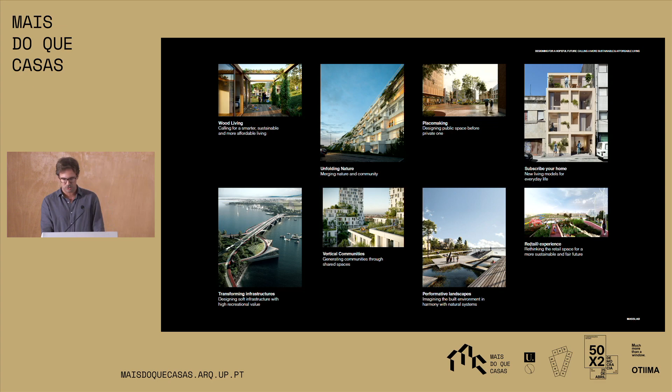So we imagine and design spaces from urban plans to buildings and landscapes to create a better everyday life. It's through a planet people approach that we build conditions for the future, because changing how people live will always change the world.

Here you can start to see a kind of a method that we do in the office. Because we think differently, because the world is always changing, we never go with one solution from the beginning till the end. We do a lot of options, iterations, as we call them, and we go with, for instance, 4 or 5 iterations for the same problematic.

This is a kind of a provocative quote: the client is never right. But actually they are never right, and we think that we know a bit better than the client what are the problematics, what's the need of the future. So we don't talk about adjectives or aesthetics, we talk about metrics and numbers.

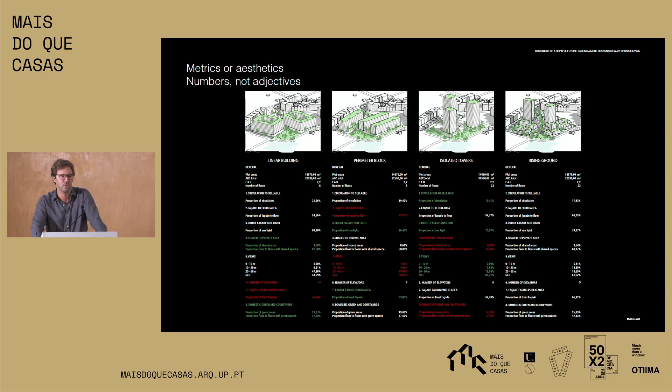So this is what we call to put things into a test. The metrics that you see below are basically the pros and the cons of each solution. So it's not regarding what we think it's best, it's what the project knows it's best for the context, the solution, and the needs.

The world is constantly changing. I think it's changing right now with issues and themes that we never thought of, technologically, politically, economically, sustainably speaking. So we do this kind of a game.

We think in the future, so that's why we call it 100 years. But at the same time, we always think about the same issues every 6 months, because what we think is correct for the future at this moment can change completely in the near future.

So by saying this, we don't have a manifesto, we have an attitude. It's not what we feel it's better for the world, it's what the world needs at this moment.

So for designing for a hopeful future, we need to think about the new living models. We know right now that the way you used to live before and the needs that we used to have before are not mandatory right now.

So we are not projecting when we are doing a building, a housing building, for instance. We cannot think in our mind in this common family of one parent, one father, one mother, two child. There's a lot of needs more than that, and what we feel is like we need to create bases, a structure that is flexible enough to adapt to the world, adapt to the needs.

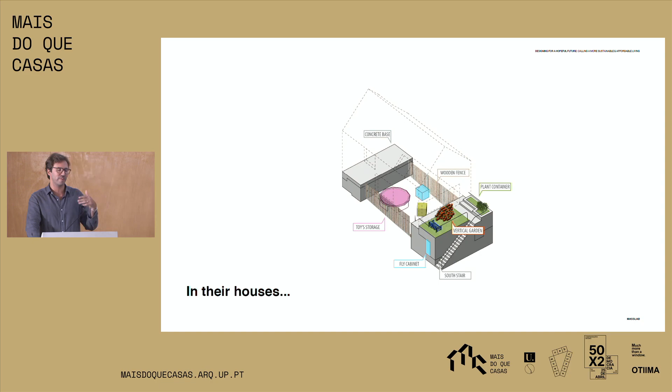So basically what we did is a concrete base that adapts to the slopes of the site, and then, by understanding the needs of each person, each family, we create a different house on top with different programs. So this is again a strategy of trying to adapt to the needs.

That was the first project. Then we started developing this idea of how we can create a plan that of course has a rigid structure, but at the same time can adapt to different needs. That's what we did in the past projects we've been doing in terms of housing here in Portugal.

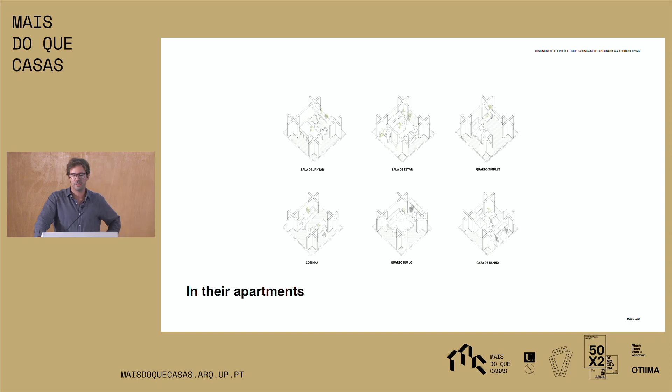So necessity dictates use and habits. Here you can see it's the same plan, the same rigid structure, but everybody, when they occupy it, can adapt it to each need. It can be a dining room, a living room, a bedroom, a kitchen. And here you see exactly the same thing—it's the same plan with different types of occupation.

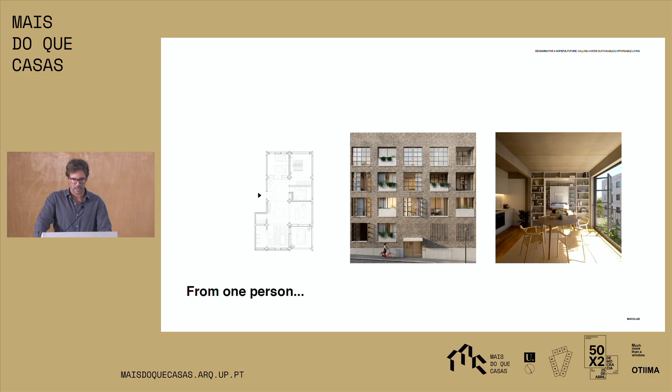So from one person to another, you basically experience different types of plans and different types of experience.

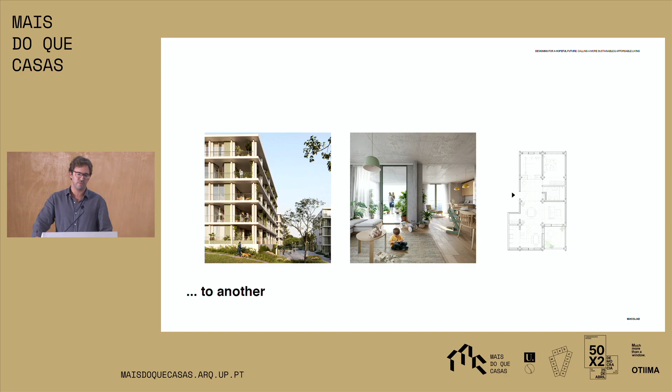Hi, everyone. So as Lorenzo was saying, we try to organize our projects on our agenda, and one of our biggest agenda items is to design public space before private space. I can recall that Paulo Mendes da Rocha states that people who live on top of towers simply don't live, because they are so detached from public life. We want to go from segregation to community.

I want to show an example. This is a project we worked on in Tampere, the second largest city in Finland. The project was in this area, completely detached from the city.

Although it's a master plan project, we wanted to create this sense of public space before private space. As you can see here, we wanted to have these three main axes: this fast track that connects with the city center, this neighborhood connection where all the inhabitants can meet, and, on a shoreline scale, this leisure line.

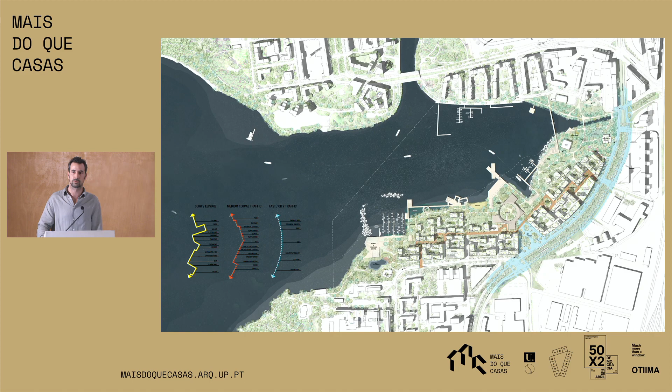We tried to create, in connection with the urban context, these kinds of social pockets strategically placed to promote public life, and also to create a hierarchy from private space to shared space to this leisure area on the shoreline.

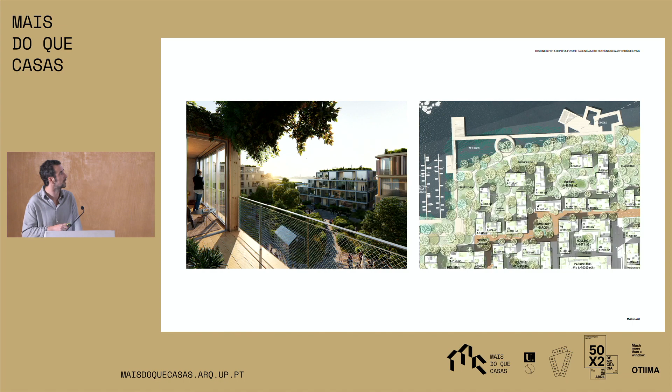We feel this example is quite cool, because community was at the core of this development. The municipality wanted a school at the core—not only a school, but a community center at the core of this master plan. We know the scope of this seminar is living, but we cannot detach living from public space, from community, or even from learning. So at the center of the master plan there was this school by day and a community center by night.

Now another example of this principle is in Lisbon—the Basílica da Estrela, one of Portugal's national monuments. We were quite happy about this because it's our second project that was actually demilitarized. Right now it belongs to the military defense, and the idea is to give it back to the city, to the inhabitants.

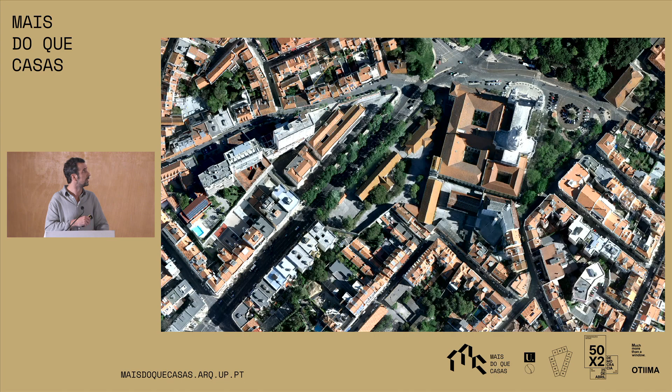It's our second project doing this, and we're quite happy to demilitarize these plots and open them back up to the city where they belong. It was quite intimidating to work with a national monument of this importance, but we were also seeking continuity of an unfinished city—we had these blocks that were pre-finished, with these weird endings happening.

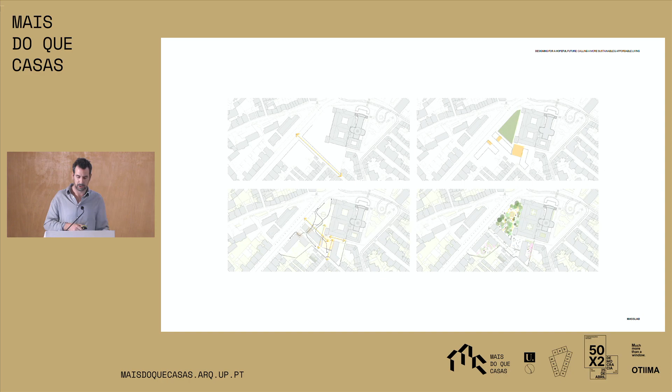So our basic idea was to reconnect this urban network, but again, because designed public space is to be designed in the beginning, we thought, okay, giving more room to the basilica and to have a garden, and then a public square over here at south, to promote this network of spaces where the inhabitants and citizens can enjoy it.

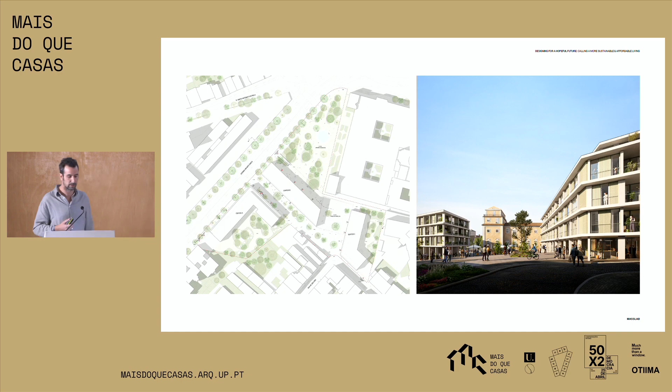Again, it's quite tough to talk about living without talking about public life and building cities, and this is quite an important issue for us. So how to generate a public space where the inhabitants can meet, but also areas of semi-public value, like this, where you can gather and have a sharing space that belongs to the inhabitants.

This is just showing a bit the different environments of the public space and how we try to reconnect with the basilica.

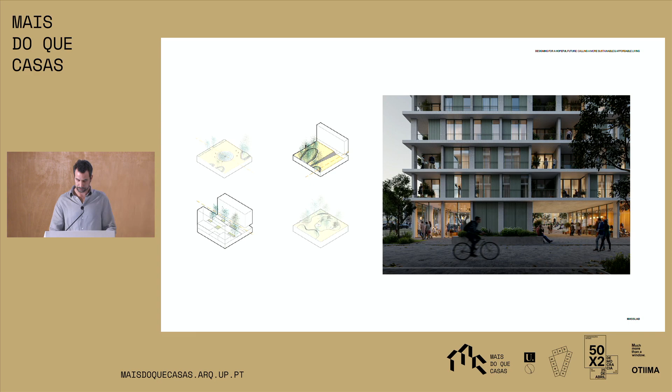So this project was promoted by IHRU, the national organism that promotes housing, and is promoting a lot of projects. We know it's quite a tough and a bit conservative brief from them, but we still had this sense of creating public space and a network of space around.

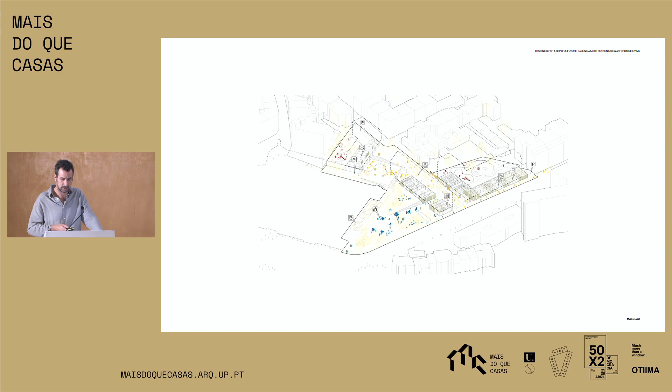In terms of the interior, the brief was quite conservative, we couldn't play, so we thought, okay, let's invest in the public space and the areas around. But there's no purpose talking about designing public space before private, if we cannot think about a shared living.

With this environment that is so challenging and so demanding economically, in terms of it lacking space on our planet, we started thinking that it doesn't make sense to privatize everything because we cannot afford it.

So why not share some rooms of our place? We can have examples from laundry space, but for example in Finland, we already see that with saunas, which not only promotes the sense of belonging and community, but also is more feasible economically, it's smarter, and we can all save space, money, and at the same time generate community.

But for us, this is nothing new. This is something that we already feel, and here we can see some images in Porto, like laundry space that was already shared, public life obviously, but even in terms of parties, São João, or having dinner with your neighbors.

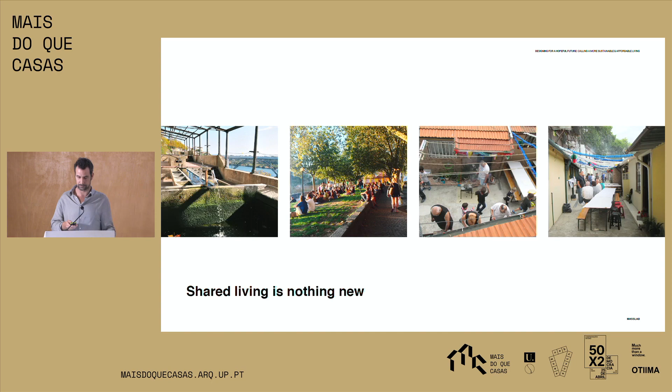I'm showing this because we're working on a small ilha - I don't know if I can translate it to Island - a small ilha in Bairro Maria Vitorina that is in Fontainhas. And we thought, okay, these themes were already there. For us, this was quite intriguing.

So we're not proposing something new, we're just basically in this example trying to demolish the old structures that don't have the conditions of living, or that don't promote this sense of shared areas.

And we wanted to stabilize a bit the topography, so we have room for these shared areas, and obviously some greenery to generate an active community.

We also had to reduce the number of houses because within this plot of 1,500 square meters, there were 24 houses. That is quite dramatic. So we tried to reduce the number of houses to provide better conditions.

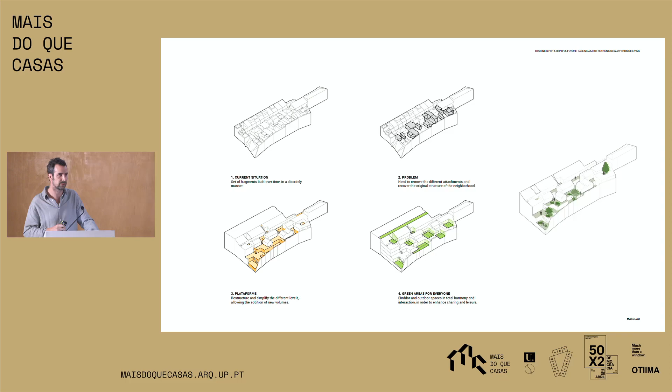And we had this idea of replacing the former structures that don't have a lot of quality, and kind of stabilizing the topography on these platforms. So we have these different areas of shared space where you have this communal living.

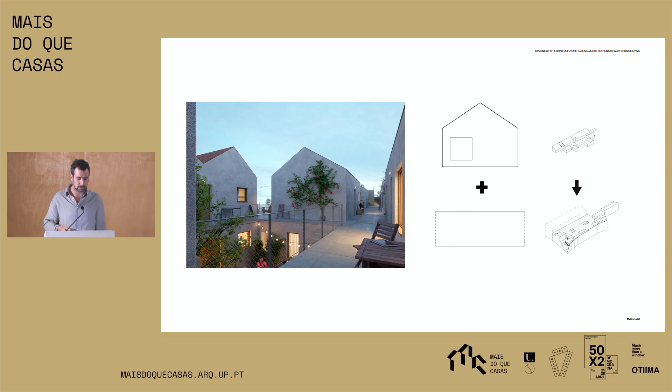A different example of this, that actually merges a bit this sense of designing public before private, but also shared space for all, was at a much bigger scale: Quartel Monte Pedral. We're quite happy that it's the second plot that has been demilitarized to be opened again to the city. This was an area of the city, the Rotunda Boa Vista, that lacked a lot of public space.

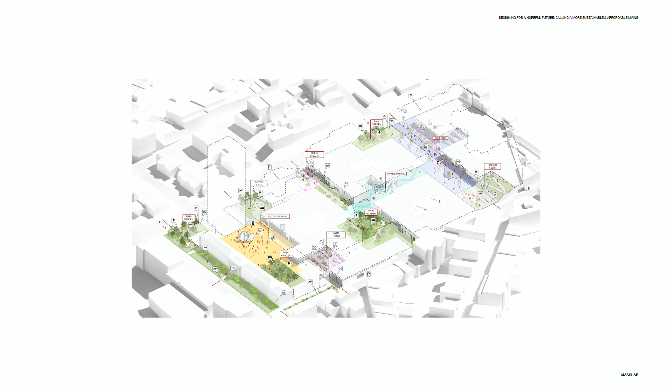And we had this brief that put a lot of pressure on the plots, like 50,000 square meters for a 25,000 square meter plot. So we had this principle again of designing public before private, connecting the streets around, but also providing room for smaller spaces, shared areas for the inhabitants - from urban gardens to urban farming to playgrounds to multifunctional areas, because designing this public level is as important as designing the apartments.

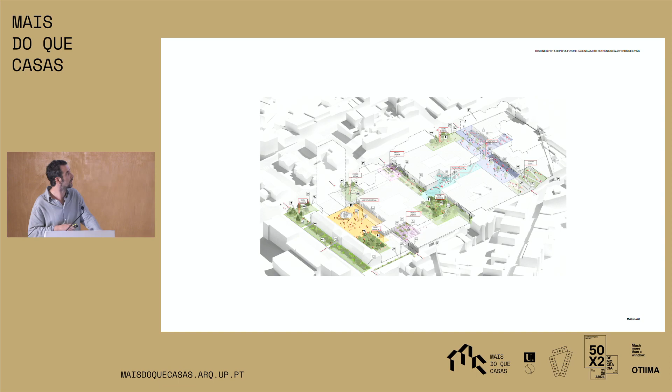We cannot fit living into just a single type of family, since the world is constantly evolving. So we try to create an array of possibilities that promote flexibility, and by intertwining the sense of the public, the shared areas, and the private, we promote a sense of community and of a more sustainable city.

So we only use what we want on the shared space. We promote the public space to enhance public life, and the private, because we obviously still need to sleep quietly.

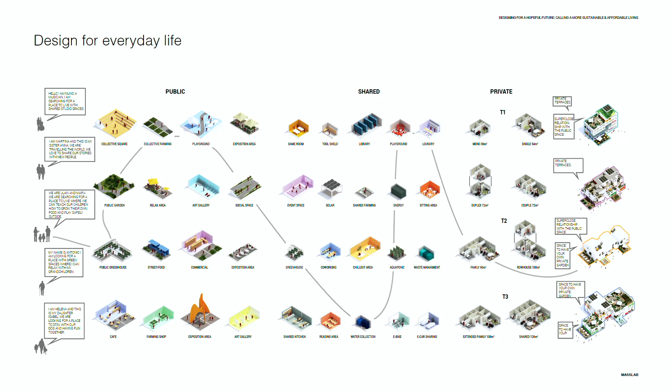So you can see the network of different spaces and the different values of the areas.

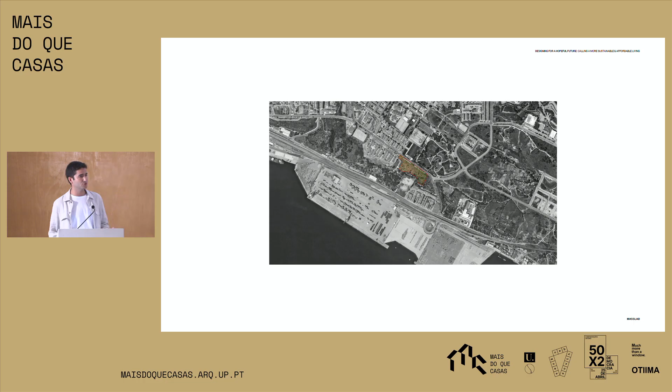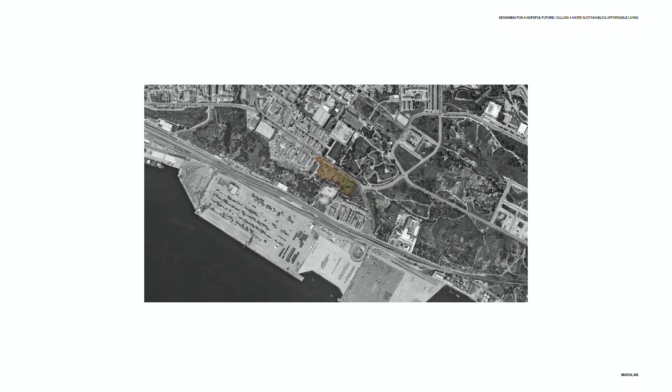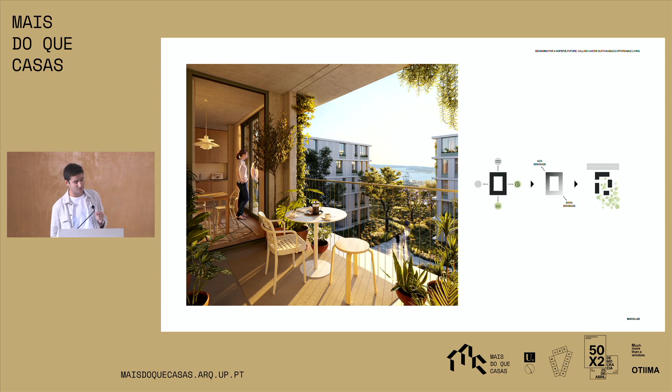Here we were in this in-between area that had a protected green area on the south, and on the north we needed to connect to the urban structure. So what we decided to do was create a strong hard edge in the north and do a gradient of construction to connect these urban parts with the green park on the south. Here we can see the scattered buildings from the park, and how we use this gradient to create and promote a close connection between views, between the park and the interior of the apartments.

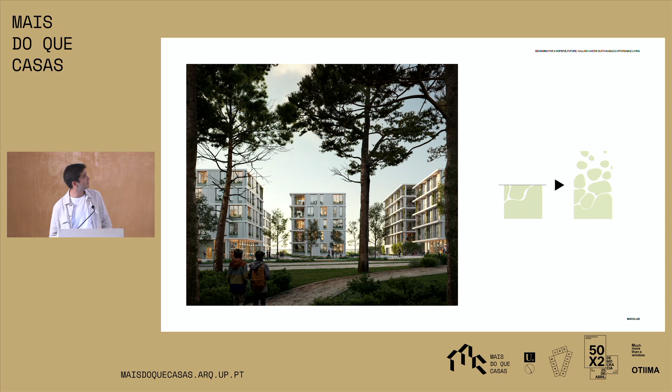From the urban part to the green park in the end, in between, we created the opportunity to make social pockets between the urban blocks. On each pocket we placed a different program: the leisure pocket, the sports one with sports activities, and the playground pocket. The idea is that by creating this urban infrastructure we can foster social interaction and community.

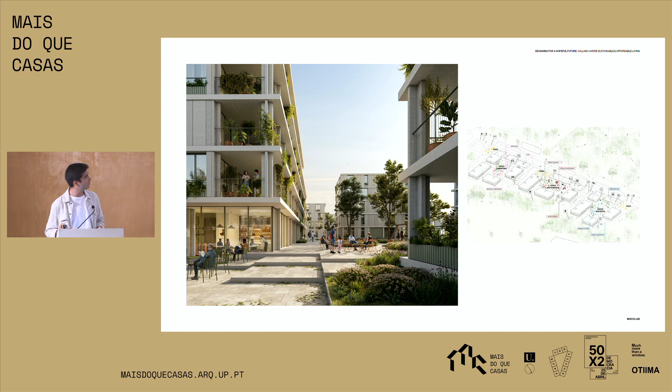So we had a project in between urban and green, but also one that promotes social interaction.

Another example here is in the north of Portugal, in a completely different context. We didn't have any urban planning, and the existing surroundings are completely disaggregated, from single houses to industrial plots to schools.

It was quite difficult, and we felt we needed to do something radical to unify this plot and its surroundings. So we made one simple gesture: creating a line that would work as a horizontal landmark in the surroundings. But then we actually created a problem for ourselves.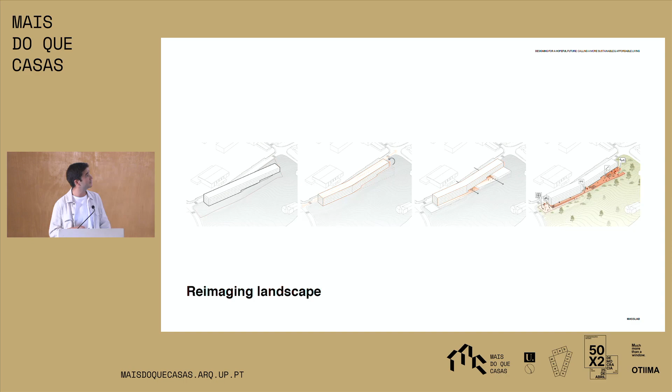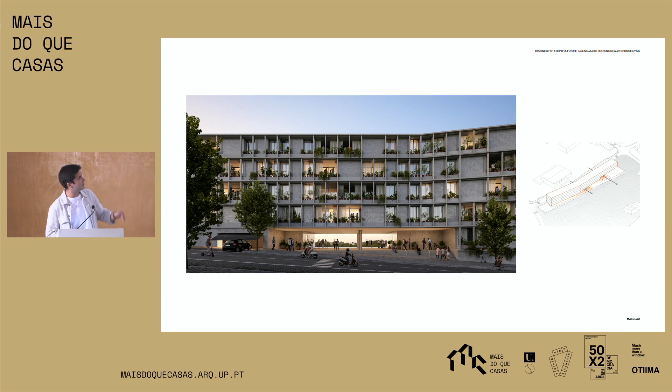How can we merge with the agricultural farmland of the surroundings if we create a wall? It's quite difficult, so we started to perforate this big mass to create the opportunity for crossing, but also for covered public space. We basically made huge voids in the building with the ambition to create a public space that could work not just in summertime but also in winter. So we were creating these covered plazas along the building.

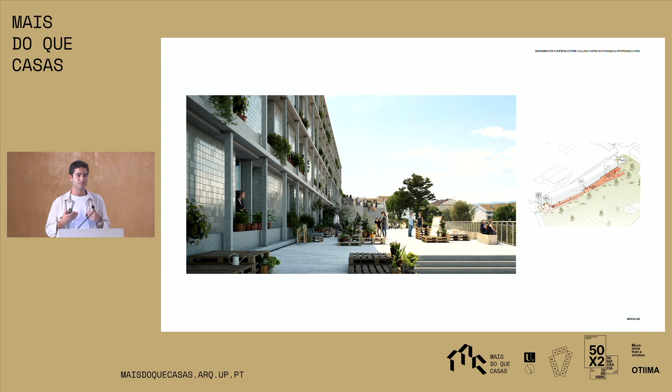At the end of these covered plazas, to mediate the relation with the farmland, we created a couple of social pockets, so it was like indoor and outdoor plazas in close relation with nature. So we created public spaces that bend into the green.

As you can see here, this long line of over 100 meters was able to create a couple of public spaces, a network that we hope will merge with the city, which was lacking a lot of these spaces.

A smaller example, even in Porto, I will try to merge nature and community within a building, not relating exactly with the city, is in Covelo, here in Porto, and we were in a plot that connects the existing urban part with the hidden rural part of Porto that we can see here.

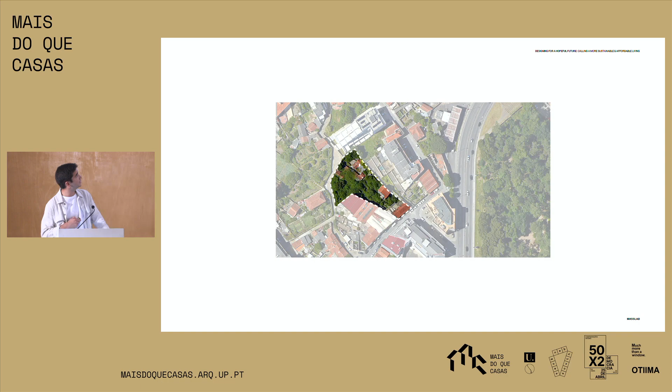So in this small project, what we tried to create is, within the building, a built landscape that would actually promote social interaction between neighbors. So it was a community within the building, and also a way to bring greenery to the entire building complex.

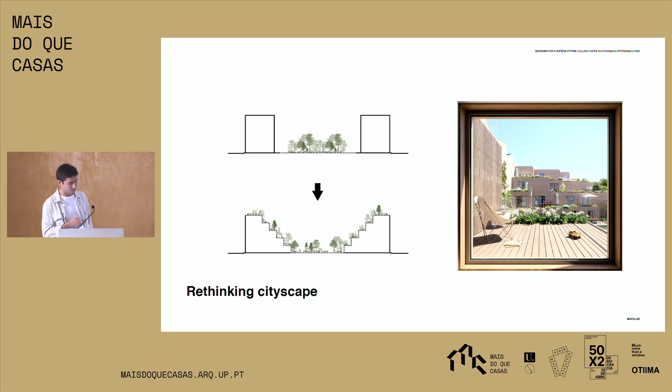We did this not just by chance, but because it was a response to the immediate surroundings of our plot. It was a very complicated plot. We had industry, collective housing, single housing, so really diverse. And what we did here is that we tried to connect the dots, and the output is actually the result of connecting these dots.

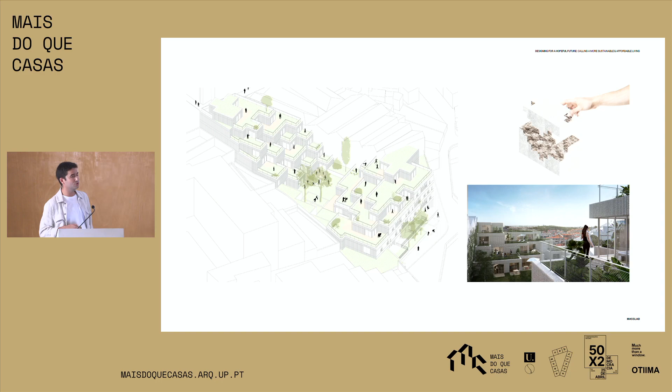And in the end, we had each apartment promoting a relation between indoors and outdoors, but also a common ground in the middle, creating this valley idea, with the hope to be like a close community because you are in close connection with your neighbors.

Now another idea that we use, which is also transversal to our projects, is this people-planet approach, something that considers both people and planet at the same time, not one over the other. This basically means, in terms of housing, that we don't consider housing as the centerpiece of a bigger network, but actually as an integrated piece in a more complex network.

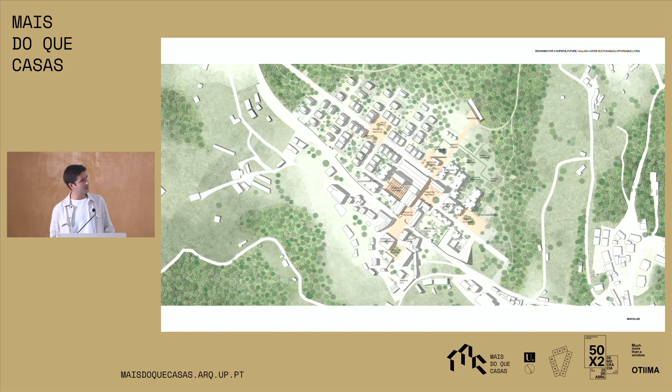This means that when you do, for example, urban planning, you consider food production, energy production, and connectivity of the city. So to show you how we do it, this is an urban plan we did near Lisbon, in Loures. It's a kind of eco-village that has an ambitious program going from affordable housing to health center, retail space, office space, and even small industries.

And what we did here, because we were in the middle of nature, is to blend all this construction with the existing nature. The plot was quite sloped, so it allowed us to mix our buildings within the nature.

We did this by using a way of thinking that considers what we call the cycles, a holistic approach to urban planning that considers people and planet. We considered the social cycle, which represents all the urban structures such as squares, plazas, and pedestrian routes, but also the economic cycle. This means we were able to design with the client affordable housing that could actually grow over time, mixing in other activities such as retail space and office space.

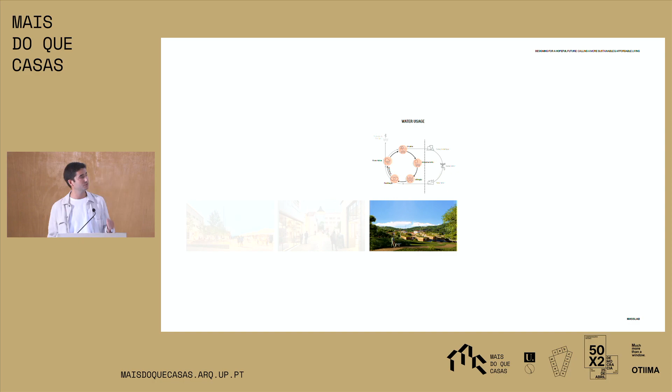The water cycle - this means that because we were in the middle of farmland, we wanted to create a water retention basin within our plot that would help feed the agricultural fields in summertime.

And the environmental cycle - because the plot was fully occupied by eucalyptus, a species that actually damages the autochthonous species, we took it out, preserved the cork trees that were there, and planted more autochthonous species on site. And finally, the production cycle, which respects the materials we chose for this plan.

So we couldn't have all these sustainable ideas and then come up with a brand new stone for the pavements. So we are now working with some quarries to use recycled stone, coming from other construction, to build all the roads and public surfaces. And for the buildings, we are studying the possibility of using just wood for the main constructions. All these cycles together represent this idea of having a holistic approach to urban planning.

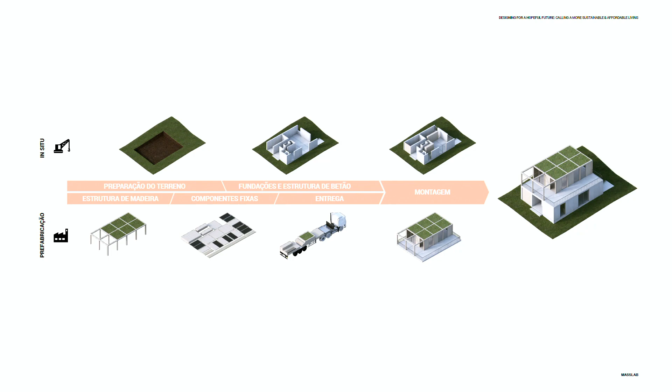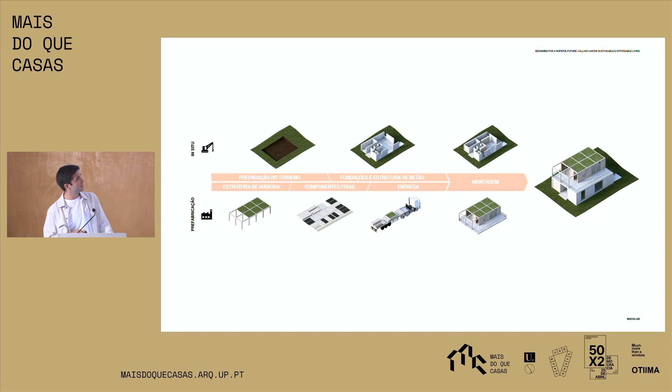In the same project, regarding construction, the terrain was really steep, so in order to mediate this relation with the plot, we used concrete structures made in situ. But for the upper level structures, we used CLT, a light wood structure that could adapt to the existing slope and actually grow over time.

This was the main idea we were able to put into this project - in order to make the housing affordable, we tried to recreate that idea of incremental growth, so the houses can grow over time. The upper wood structures could be able to start growing in the future, like a module that would be really easy to attach and grow with the families. So going from a model where the family, when it grows, needs to change the house, we are trying to do a model where the house can adapt to the growing needs of each family.

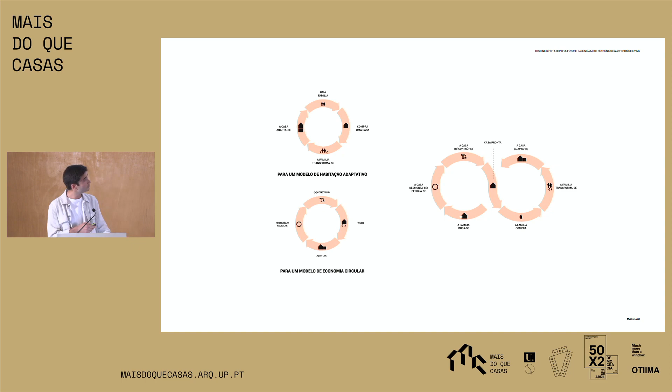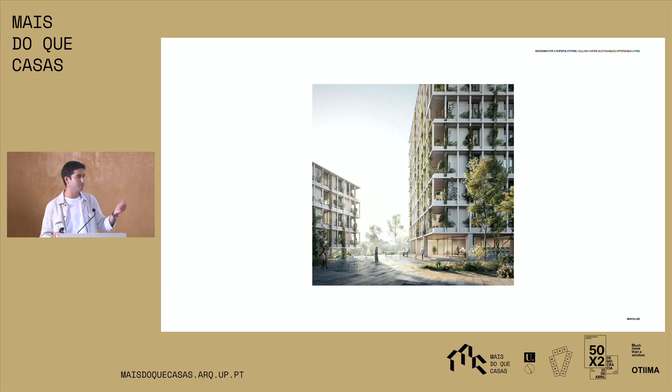And now just a small example of an open call for co-creation of a really interesting project that we are doing in Almada. This is a housing project with controlled costs. We wanted somehow to create some greenery on the facade, but we were working with controlled costs. We had an issue: we don't have money to build in-built pots or flower pots on the facade, and we cannot have a building that is high-end to maintain. So how can we do this?

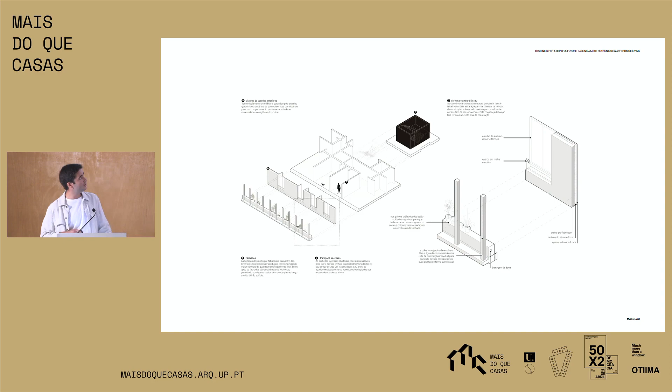We came up with a facade system that had in-built voids on the facade prefab panels, connected to the rooftop water collecting system and filters in order to irrigate the future plants. So each resident could be able to put their own plants on the facade, and this facade could adapt with the use of each inhabitant.

The idea was, okay, it can be a super green facade if people collaborate on building it, but if they don't, it's going to be more of a concrete building. The idea is to foster this sense of taking care, to foster this sense that in order to respect our neighbor, we need also to take care of our own living. So, thank you guys.

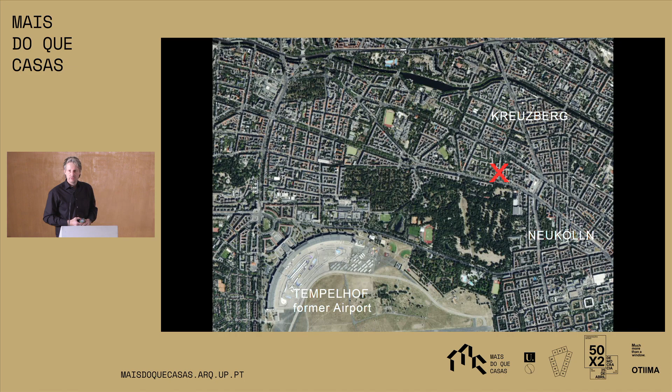You recognize this small partition of houses, and that is how this city was built and developed 130 years ago. Each house had its own client, usually not an architect but a masonry guy capable of doing these houses. This is how these areas, these boroughs, developed—and what a lot of people now, visitors or residents, think is so charming about it. There's sometimes also a lack of planning. This is what I want to refer to, and also the private responsibility of a lot of people, not only one client—but we'll get to this topic later.

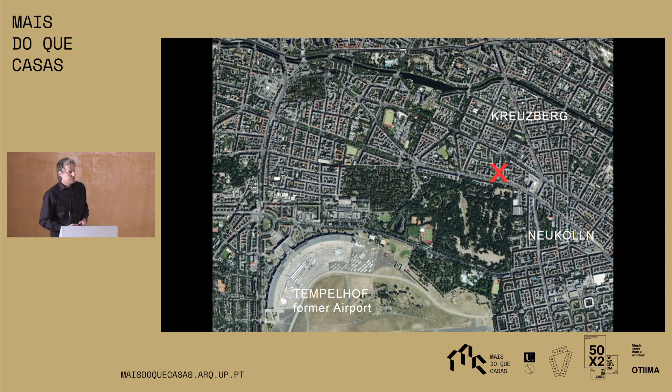So we want to talk about these three projects we want to present. It's a project we did 7 years ago—a shared space, Malmöer Straße—where 24 apartments of different owners built a group and we built the house together. Then there's the project Lovo, which Wenke Schladitz, my colleague, will present. And LOVV—these are both projects for the LGBTQ community, but you will get more information about this later.

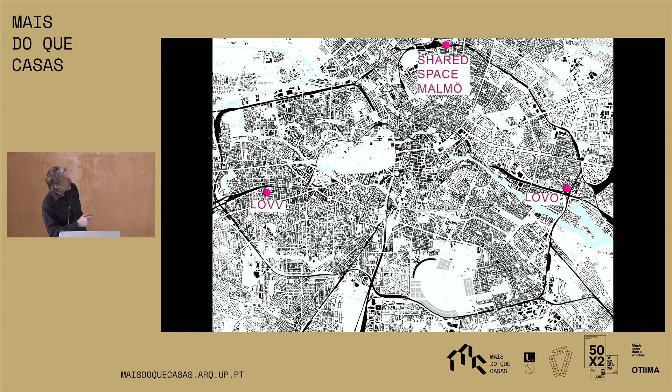You see, this is the inner part of Berlin. This is the public transport, the S-Bahn ring, the black line. And this project here is the one we talk about. It's in a very dense urban area. Later, Wenke will talk about LOVO and this LOVV project.

It's a thrift store, but it was run by a church-like organization, and it was an important element in this neighborhood. We found this lot, and it was clear from the beginning that this hut had to go. But we knew we would be part of gentrification, and I think this is what happens all over and will happen in the future. Gentrification, but you can control a little bit of the things.

A private client would not have made this store, because this area costs money, and you could have built an apartment also in the ground floor in Berlin. But this group decided to take the money in hand, and they made a long-term contract with the people running the store, and they get rent, but it's only rent without revenue.

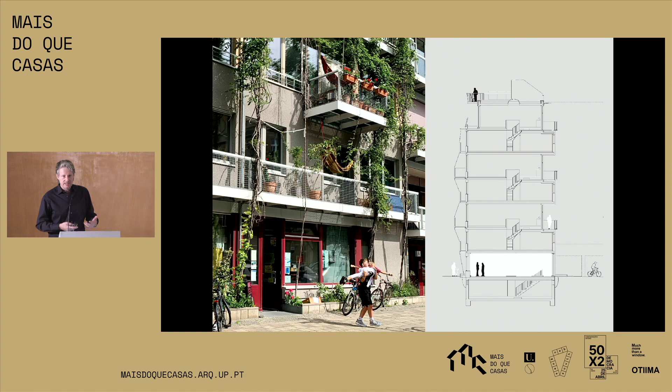So here you see the facade, you see the little green plants. In our case, we decided not to put the plants on each floor. They start from the ground, and even after 5 or 6 years, you see the facade gets a little bit wild, so of course we like that. The people use the facade. And that's what it looks like now. After 7 years, it's a Glycinia wisteria. I can recommend it, I don't know whether it works, it grows here in Portugal. You have much nicer plants, I would say.

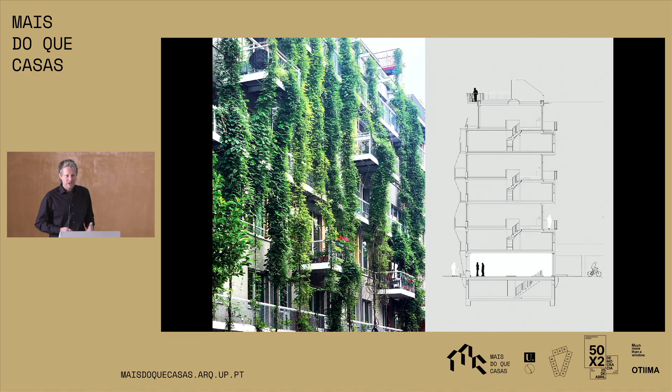In this case, it was clear there's a gap between the 100-year-old buildings, and we have to go like this more or less. That was clear from the city planning. But then the most logical thing would have been to do 2 staircases, given the size and the typology of the adjacent buildings.

And we decided, though it took a while, that we make 1 staircase. So what's so interesting on this issue? The interesting part is we were building for a group of people. These people got to know each other over the process of building, so it's not individuals. And if you want to use the staircase and the means of circulation also as a social space or communicative space, you have to understand that if you make 2 staircases, the person from staircase number B is someone you don't meet accidentally. So it's a very simple thing, but we decided to make 1 staircase and put open corridors on the back.

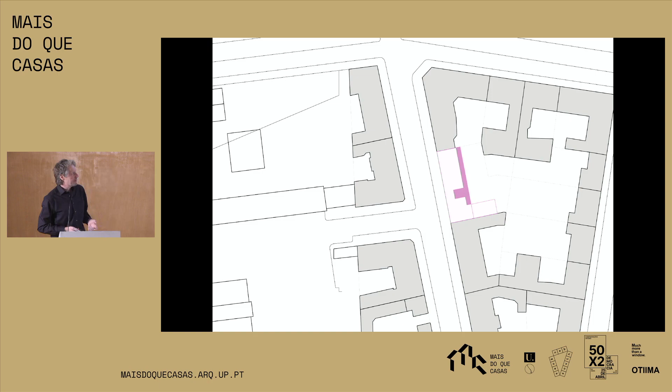Also to deal with these means of circulation, because that's pretty all we have. We cannot add money and space to make communicative spaces, but we could work with the means of circulation. So you enter the house through a lobby, and there's also this little detail on the door, which is, of course, communication in different scales.

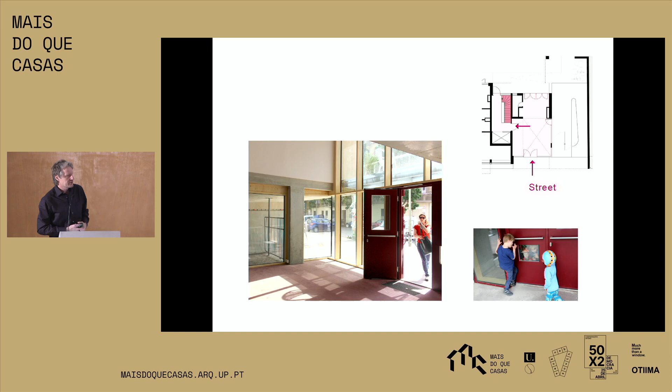This is also multifunctional. It functions as a lobby every day, but you can also use it for different purposes. When it's used, of course, you take the ramp to the garden and enter the house from the back. So there are multiple connections visually, but also walkable connections in different ways. That was important for us - not arbitrary, but in a logical way.

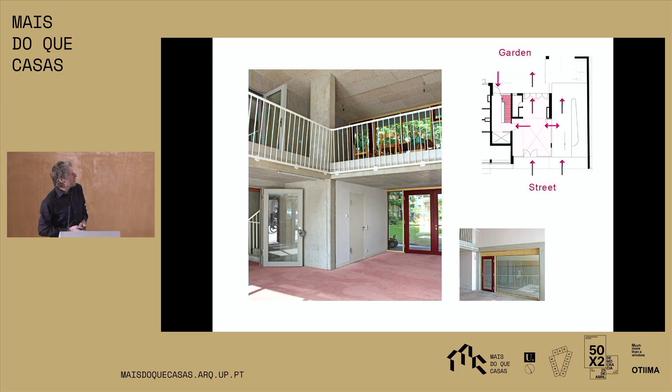So from here, now you see how you enter the garden. You see the ramp that leads down to where there's a big bike garage. And since you did not have to put insulation, it was fun for architects also. We needed some fun part to make some nice concrete structures.

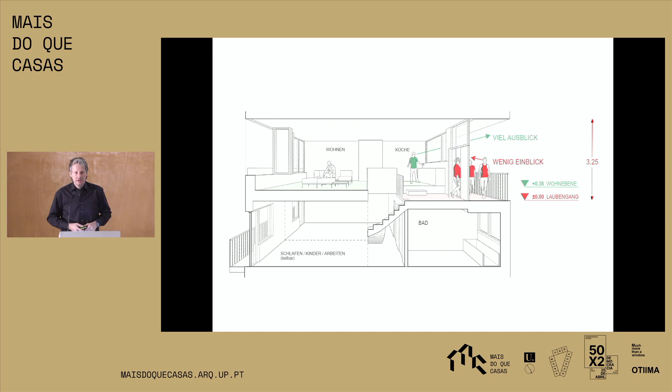I have to get to this scheme. So the trick, you can call it a trick, was that the Laubengang - this corridor - is where the red people are, is on one level, and you enter the apartment on the same level. But as soon as you are in the apartment, you go two steps up. So in this kind of communicative hierarchy or social hierarchy, when you are in the apartment you're of course private, you're vulnerable, and so we put the person in the apartment on this higher level to look down to the public.

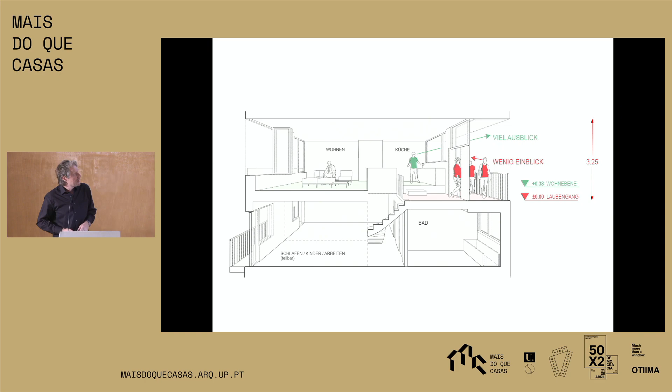It's a very subtle, small change, but it really made this Laubengang work. And it's also a small Laubengang, but even so, people use it, people meet there, and I would say it's an interesting scheme. Now again, you see how the kitchen always overlooks the Laubengang and how the person in red is on the lower level.

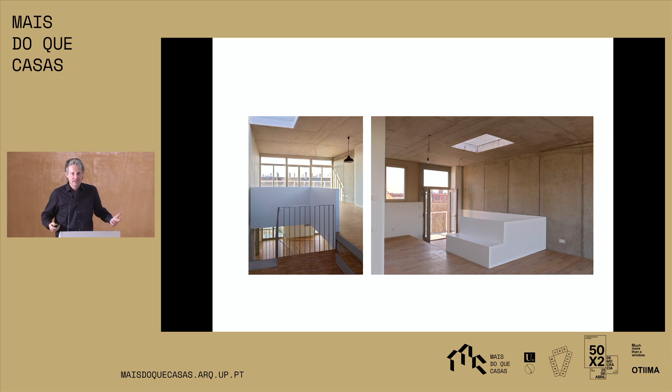But we made this piece so we could remove it. So people, in case they would ever have somebody come and check the apartment, they keep it in the cellar - it would be there - but otherwise they use it like this.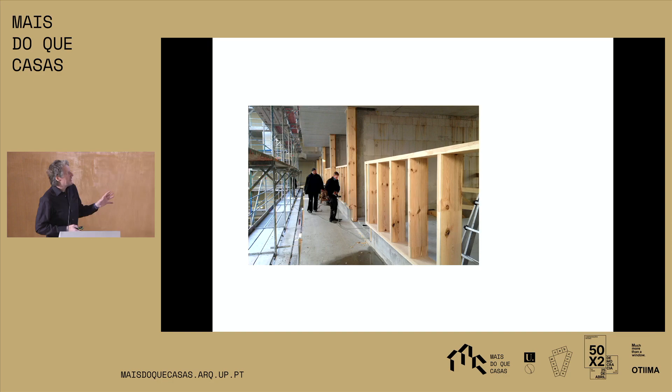It's a hybrid building - that's just to the end, saying something about the construction. It was one of the first at this time, 8-9 years ago; it's now a very common practice that you have a massive structure of the building, but all the outside walls are made out of wood.

And here, this is a picture a lot of people like, but to be honest, what's on it? It's a rectangular cube, and we left the surface of the concrete, and the only thing is the window. Sometimes it's really small things that you have to do as architect that really make a difference in how people use the space.

So now, Wenke, I think we go and hear something from you about LOVO and the LOVV project. But before you start, I want to just say two sentences about the structure or the evolving of LOVO. This is part of the LOVO facade.

So my partner Ulrich Vogel, he sits in the audience here as well, and we decided to get really financially involved into this project. We thought this is a house that Berlin really needs, and we found a bank that financed it, and we found the lot. That all sounds very easy now, but it wasn't easy, but it is possible.

If you understand a little bit about economics, and now again I have to address the ranks in the back, because you are our future. In a couple of very little years you will be confronted with this question: what do I do with this profession? How do I gonna work? If you understand a little bit about this boring stuff, like economy, financing, and a little bit about contract law, you can bring people together to start a project. So you don't have to sit and wait for not the right client. So you have some more power than some of us traditionally think.

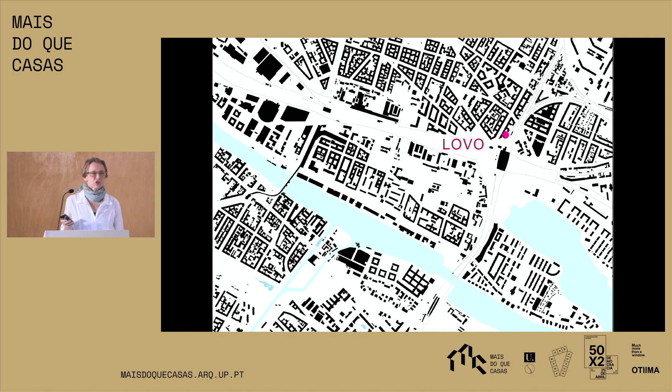Also, in the ground floor we have the common public space, then four floors with shared apartments for the LGBTQIA+ scene, and more or less 25% refugees. And the upper floors are three apartments to rent on the free market.

As you approach the building, the first thing you notice is the cafe on the ground floor. This is a small but important place to open the house to the neighborhood and for everyone who comes by and wants to have a look and go in. And what is also very important is that the people who live in our house have the opportunity to work there.

In this house live people, most of them were not really able to work 8 hours per day. They need support in everyday life, and some are mentally ill, others are in need of care. So some of these people can work there maybe for 2 hours a week, and this is great for them to make this work experience.

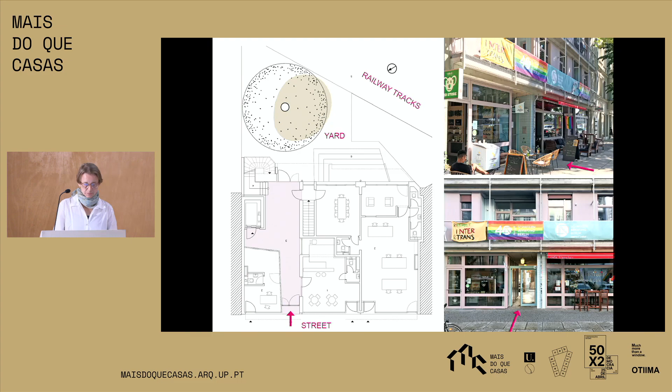So here you see the site plan. This is the property, it's right and left existing houses. At the back of the property, it's bordered by railway tracks, a kind of natural barrier. The terrain rises a bit, and for us it was always a question if it's safe for this vulnerable group to build a safe space. But we didn't want to build high fences or walls, of course.

So we also thought a lot about the entrance, the main entrance. You see where these arrows are. So we decided for a glass door, so you have a look through into the garden, and the entrance is between the shop and the cafe, so it's very safe at daytime because there are always people there.

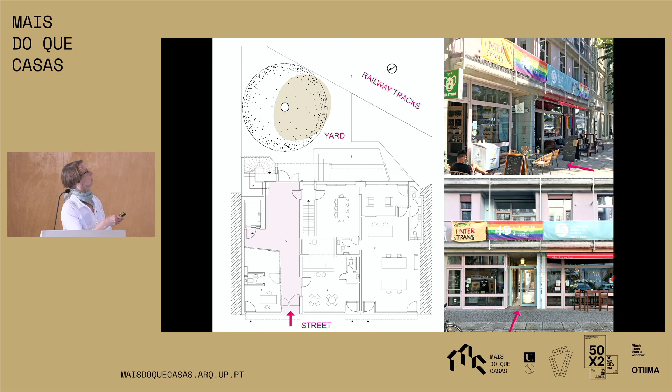And yeah, so let's go inside. This is a passageway. Also here is this one.

It leads to the elevator, to the stairs, but there's also enough space to repair your bicycle, and maybe you're protected from rain. If you sit outside and it starts raining, you can put your table inside. This is what we always try to do, to use the space multiple ways. In general, the space was limited at this project, and so was the budget, so we always find solutions to save space and money.

A question we discussed very often was how to create a safe space for this vulnerable group of residents, so that they feel protected, but without losing the open and welcoming character of the house, and so the residents don't feel locked or isolated. This is a contradiction, but we try to create a so-called safer space.

I think many of you know this term. It's actually a space where people who face discrimination in everyday life for different reasons can meet, have a break or pause from discrimination, and exchange with like-minded people. These spaces have a higher sensitivity to discrimination themes, but they are also not totally safe, because this is also wanted—the people should not feel totally isolated.

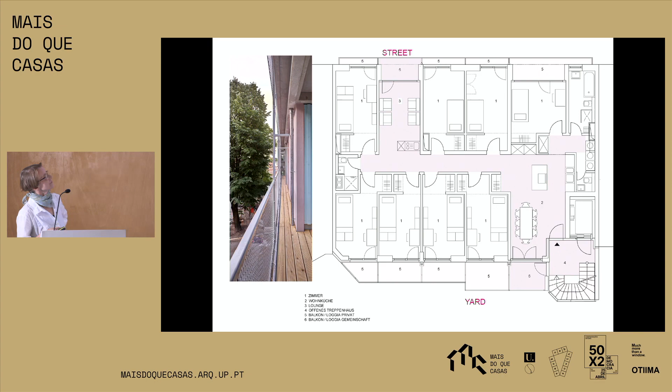So here's a floor plan of a regular shared apartment. You enter the space here in the staircase over the yard, and then there's a common kitchen, no corridor or something. You can go this way, and then you're back to the street—it's a kind of circular thing. So we try to avoid dead ends all the time. This is a private room.

We designed simple furnishing for one room as an example. Here are some common spaces, and a barrier-free accessible bathroom—we put an effort into designing a beautiful bathroom for people also in wheelchairs.

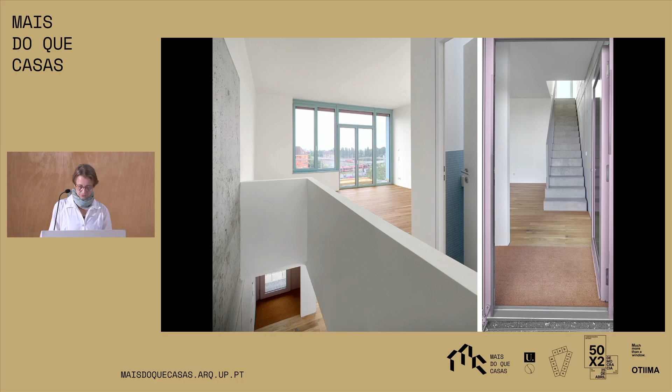So here are the two upper floors—this is a kind of three maisonette luxury homes, accessed via open corridors again, also called Laubengang in German. These apartments are luxurious in a spatial sense, with four balconies and great views, and they are rented on the free market. The high rents contribute to the financial concept of the whole building—it's a kind of cross-financing. The higher rents in the upper floor support the lower floors.

As we all know, the perception of colors is very personal and subjective, but in the end it really makes a difference, and we are really happy that we decided on 4 colors this time. We tried to develop a sensitive, graduated color concept, and it makes the building really more friendly and inviting, I think.

So our next LOVO is a LOVO with double V. It's situated in a nice area in the west of Berlin. Nearby is also a train station, and it's a very nice, vibrant, popular area.

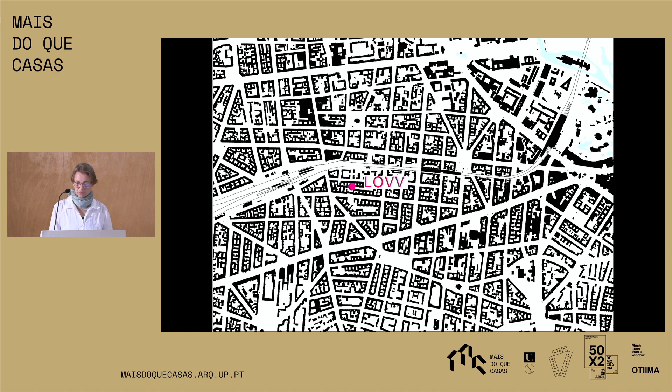We are almost ready with the planning now, and the construction site has already started. It's a kind of extension. The first LOVO building in the foreground was an existing building converted in 2011, and we are now planning the new one in the yard.

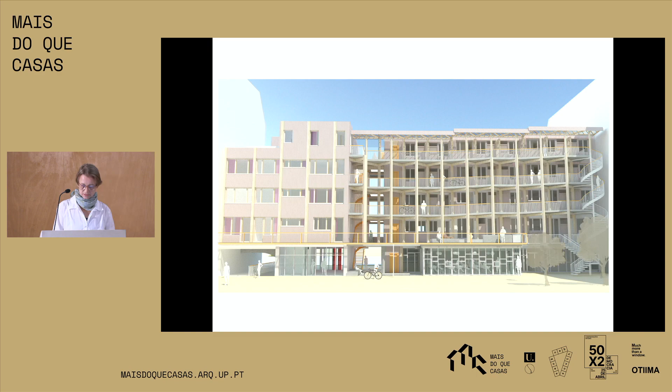Many spaces for community, like a library, 3 common rooms of 30 to 100 square meters, and a fully equipped kitchen and different other things. A bit closer.

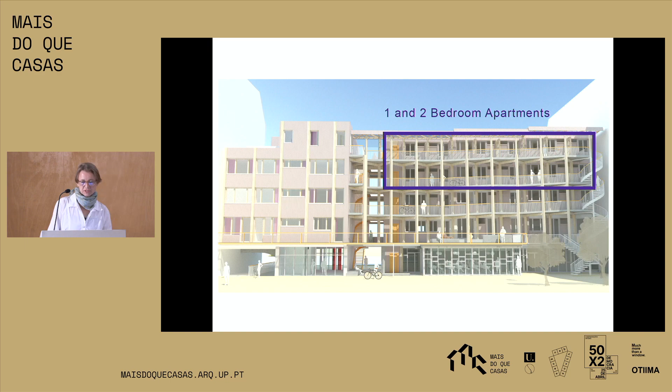So here, this time we also have a special mix of LGBTQI+ people, and the mix is also more special, like in the other building before. We include very young people too.

There's a shared apartment for teenagers, and we also have student shared apartments, and again for older people in need of care, and also 1 and 2 bedroom apartments. It's a mix of different forms of living.

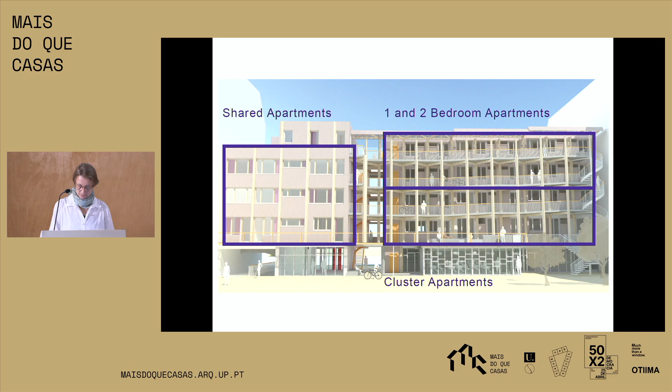This time it's a wooden structure. The supporting structure is also made of wood, the walls and the ceilings. It's so-called glued laminated timber.

We are mostly excited this time about this type of so-called cluster apartment. I think many of you know this term. Every inhabitant has their own very private space, here in this area with the greenish windows.

It's relatively small, but there are spacious common areas for all, and we try to find a good balance between the private and the common spaces. For instance, there are 3 entrance doors, so you don't have to go through the kitchen all the time if you don't want to. You have other possibilities.

So you can divide it with curtains, you can have a guest room inside, you can furnish it, of course. I think if you compare it with a 30 square meter apartment, you have much more possibilities here to do anything.

Also you have a fully equipped kitchen, you have a big table, you can invite a lot of friends, but you can't if you live in a small 1-person or 1-room apartment.

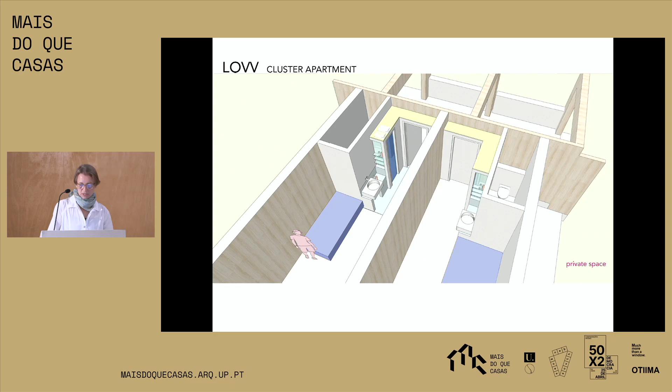So here you can also see that this arrangement of the walls opens the space more up and lets the space appear larger, and allows an optimal use, I think.

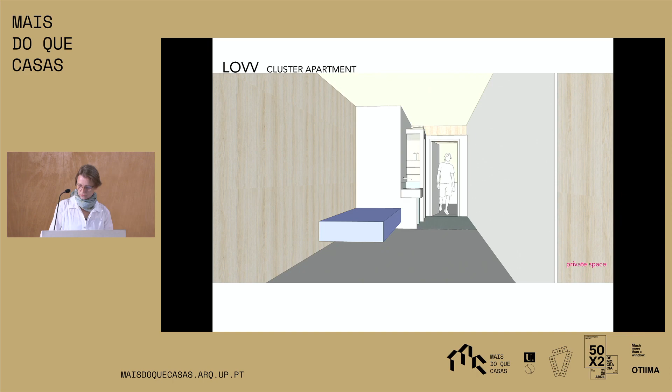So how much time do we have now? I thought about saying some last sentences. Five minutes — I have five minutes, so that's not quite nice. But yesterday, I must say, after a while I couldn't really listen anymore, and I felt tired, it was a little bit too much maybe.

So I said maybe we should try something different now. Sometimes it's also good to surprise ourselves.

So I would like to do a little meditation with you all. Could you please all put your handies aside, your mobile phones? Close your laptop, please.

Okay, everyone ready? Yes, it will be a short meditation. Make yourself comfortable on your chair or where you sit.